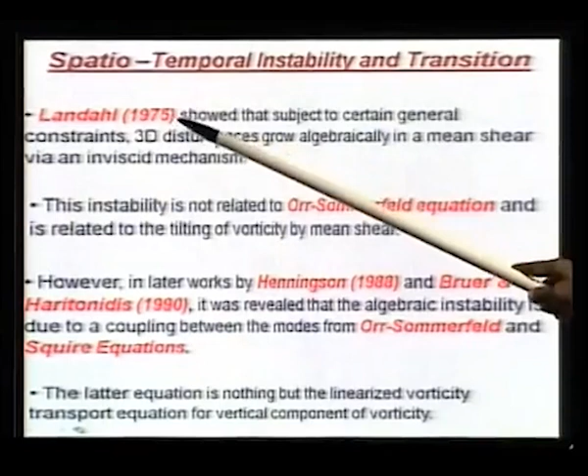Having discussed spatial and temporal instabilities in isolation, we now discuss spatio-temporal instabilities, where disturbance grows both in space and time simultaneously. A lot of work has gone into this. One of the earlier works was by Landahl, who discussed an inviscid mechanism where 3D disturbances can grow algebraically in time and space, a mechanism distinctly different from the viscous instability given by the Orr-Sommerfeld equation.

Subsequently, Henningson, Breuer and Haritonidis revealed algebraic instability due to a viscous mechanism, coupling arising from the Orr-Sommerfeld equation and the Squire equation. The Squire equation is nothing but the linearized vorticity transport equation for omega y, considering a plate with flow in the x direction.

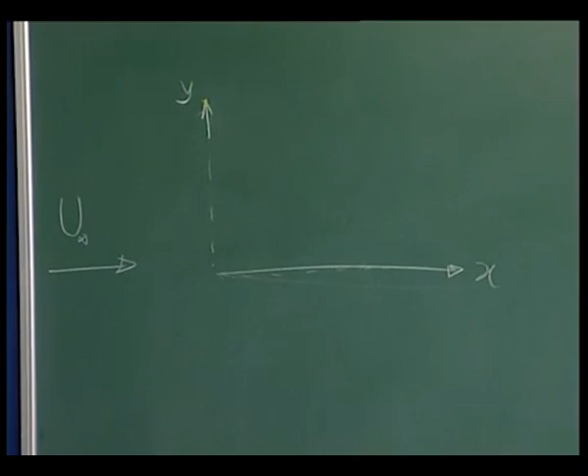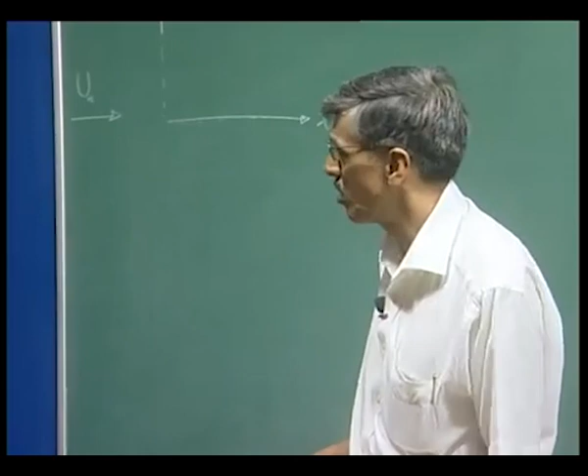There have been sporadic efforts going on and off, starting from the original observation of Morkovin that apart from the classical viscous or inviscid route, you could also have bypass transition. These efforts were looking for the bypass mechanism through which spatio-temporal instability can occur.

In the context of coupling between the linear modes given by the Orr-Sommerfeld equation and Squire equation, Breuer and Landahl found that if you go to the corresponding nonlinear stage, you could find a secondary instability that could lead to a spectacular growth of disturbance, directly leading to turbulence.

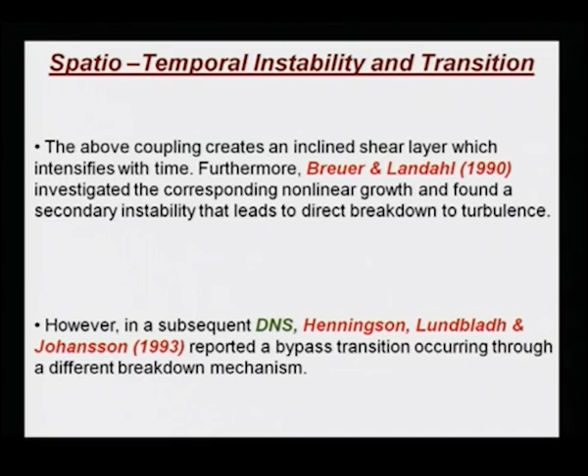While these things are going on, there are also efforts solving the full Navier-Stokes equation without assumptions, called direct numerical simulation. In one such effort, Henningson and co-authors talked about a bypass transition mechanism that does not depend on any of the previous linear instability mechanisms.

When looking for any bypass mechanism, people were looking for algebraic growth. This is of interest because it could lead to transient energy growth itself as the primary event, causing growth of disturbances by a factor of 100 or 1000, where nonlinear effects can directly come in and you get turbulence directly. If this happens in scenarios where viscous instabilities are not predicted, that is the subcritical route as pointed out by Breuer and Kuraishi.

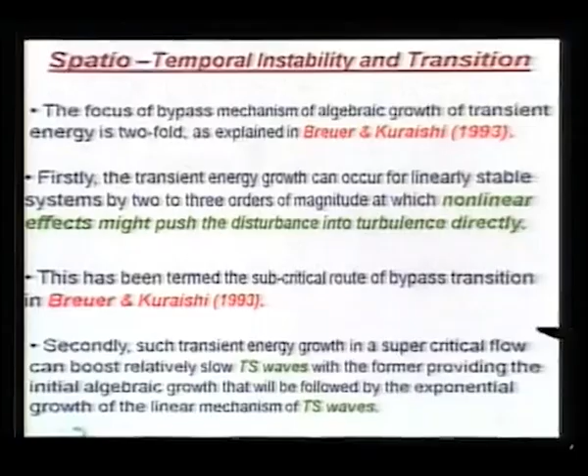The second route could be that you are in the supercritical stage, where you already have weak Tollmien-Schlichting waves, and if over and above that you have a layer of algebraic growth, you get a compounded effect that would also lead to turbulence. These are the two motivations for studying algebraic growth.

We have now stated quite a few of these scenarios. They are conjectural in the sense of theoretical projections. They have not been systematically studied experimentally in a controlled manner, so that one can unambiguously say this is exactly the mechanism by which things are happening.

There is an alternative viewpoint that this algebraic growth could occur due to the presence of modes which are not the normal modes obtained from the solution of the Orr-Sommerfeld equation. They are basically the non-normal modes.

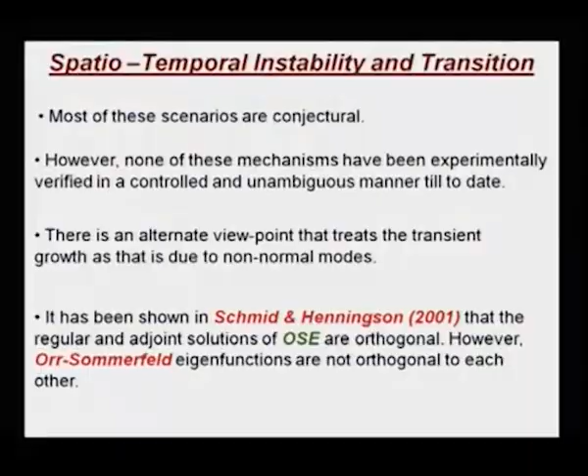Schmid and Henningson are the proponents of this view, and they noted that Orr-Sommerfeld equation modes constitute a set with respect to the adjoint of the Orr-Sommerfeld equation. However, each of the eigenfunctions of the Orr-Sommerfeld equation are not orthogonal to each other, so they are essentially non-normal.

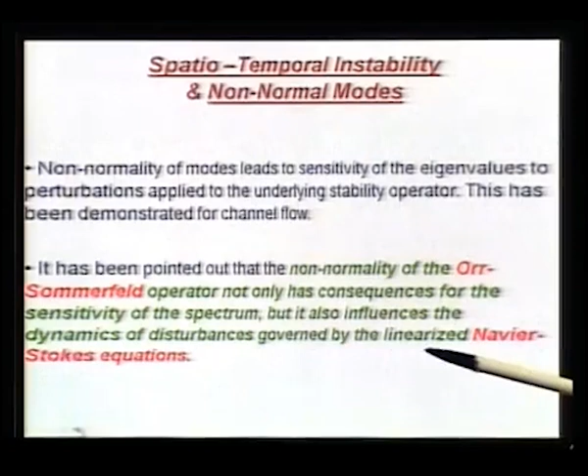Despite that, it has been noted that non-normal modes make the system very hypersensitive to background disturbances, due to the property of the stability operator of the governing equation. Some calculations done for channel flow have shown that this non-normality, via its sensitivity of the spectrum, can show completely different dynamics than given by the linearized Navier-Stokes equation.

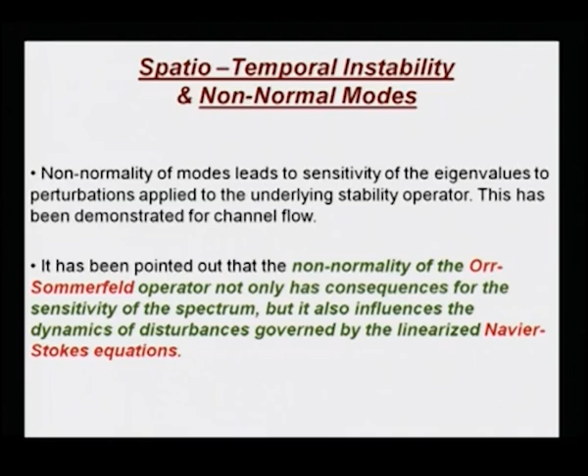When we take stock of this, we notice that the transient growth that occurs as a resultant phenomenon - even for a Blasius boundary layer at Reynolds number of 1000 - shows a 1000-fold increase in the 3D disturbance field. When you look at the corresponding 2D disturbance field, the growth rates are far too smaller.

However, what we are looking at in all of these cases is that one has talked predominantly about 3D disturbance field. The legacy of 3D disturbance field is attractive because even for fully developed turbulent flow, we have a mechanism of vortex stretching which is present in the 3D field. So people have tried to synthesize these two points of view and are looking for 3D disturbance field alone.

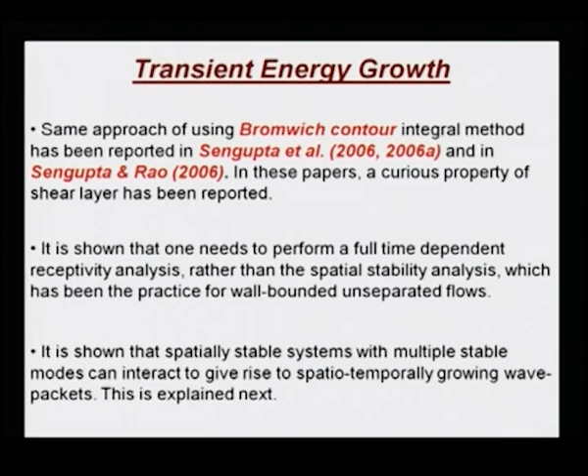However, when they interact, they can lead to a kind of spatiotemporal growth. This was something that was not known for more than the last 20 years.

But what is in a sense happening here can also be explained from our mechanical energy equation that we have developed. This was done very recently, just a few years ago.

We later also showed that this mechanical energy perspective is basically all-encompassing, because it comes from the Navier-Stokes equation and can include both the viscous as well as inviscid mechanisms. The main term comes from the nonlinear convection term, and the equivalence of viscous instability and the energy-based theory was also established, which we have talked about recently, or will talk about even more.

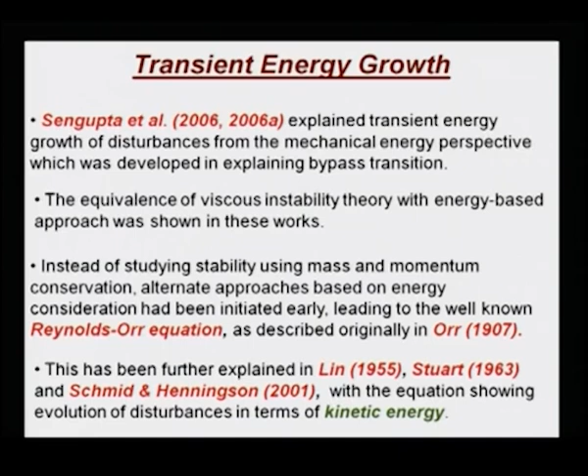However, we note historically that people have tried to study stability of flow from energy considerations. This goes back all the way to the time of Orr and Reynolds, who developed an equation called the Reynolds-Orr equation. This was further studied and explained in Lin and Stuart's work. You can also find it in Schmid and Henningson's monograph, where an equation for disturbance kinetic energy was developed.

Okay, so let us look at what this could be. This is basically obtained by looking at the Navier-Stokes equation. If you write it in indicial notation and then take a dot product of it with respect to the velocity itself, so I will get...

This term comes from the local acceleration term, and the convection terms will come in two sets. One is due to the action of the disturbance stress on the mean shear, and another is a complementary term that comes as a gradient transport term, which also includes the pressure term, the triple correlation of the disturbance term, as well as some viscous term here. And this is the usual pure viscous diffusion term.

The reason we write this is because if I look at this, this is nothing but a divergence term. So if I take a volume integral over the whole domain, and we go over a very large domain where some of these disturbance quantities go to zero, then we will notice that this term will not contribute.

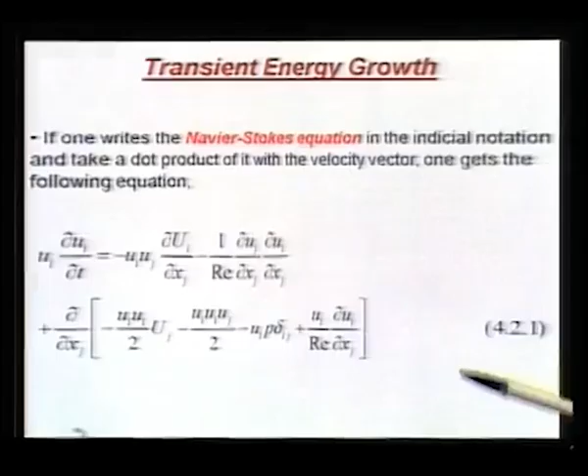Okay, and what about this term? This term is something like a second moment term. This is also a second moment term, but when you are looking for the second moment term evolution equation, this is already known—this is due to the mean shear. So that is like a linear term when you look at the evolution of the second moment.

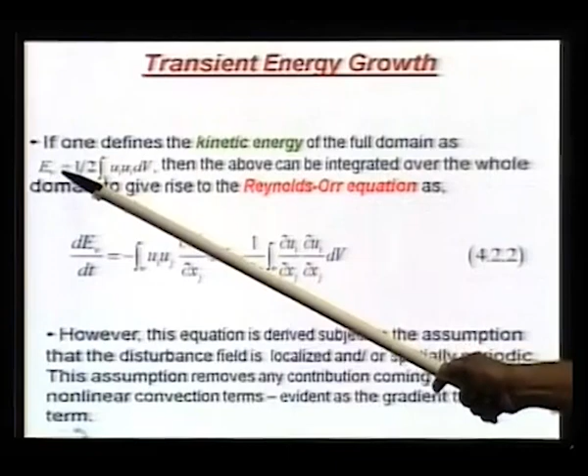In particular, you would be interested in talking about a particular quantity, the kinetic energy, which is also a second moment, but is nothing but half of ui squared. So if I write down the second moment matrix, these are the sum of the trace of that matrix—half u squared plus v squared plus w squared—integrated over the whole domain, call that E subscript v. That is your kinetic energy of the full domain.

And the previous equation that I wrote, we saw that if we integrate over the whole volume, the left hand side will give us this time rate of change of E v, and the right hand side you get this term, which comes from the effect of mean shear on the second moment term, and this is the viscous term.

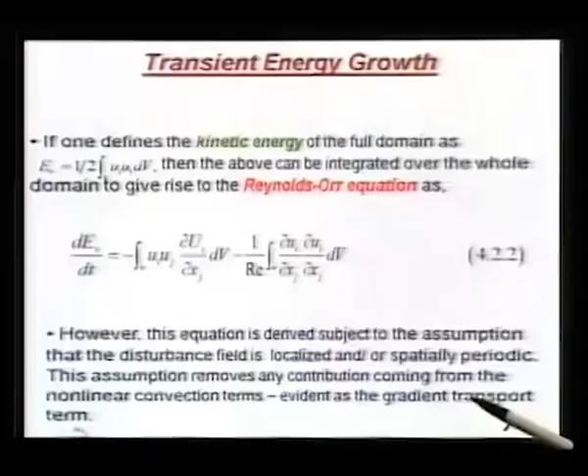This equation is derived subject to an assumption that the disturbance field we are talking about is localized, so that if we go very far field, it goes to zero, or at most could be spatially periodic, so it will cancel out. This kind of assumption actually removes any contribution coming from the nonlinearity.

What we are noticing so far is that most of the time the nonlinear convection terms are important. Even if you think of Rayleigh's equation, that was essentially the role of the nonlinear convection term. Then in Orr-Sommerfeld equation, we also looked at the nonlinear convection term and how it exchanges energy with the viscous diffusion term.

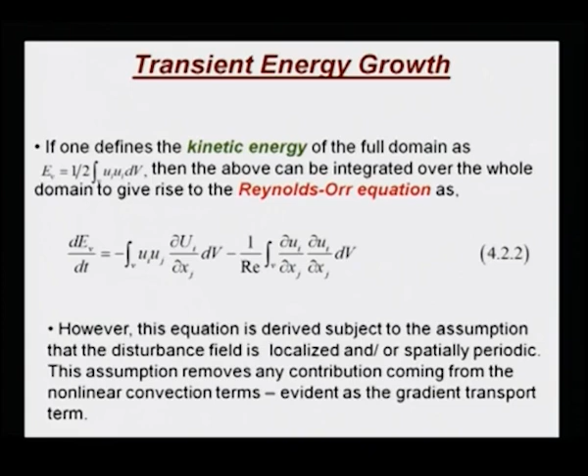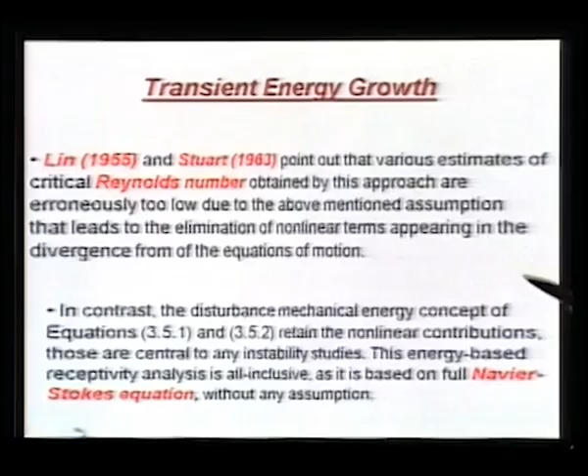But in this Reynolds-Orr equation, you lose the nonlinear term altogether, so no contribution comes from the nonlinear convection term. And what might happen as a consequence is you get a critical parameter like critical Reynolds number which is abysmally low. This was noted quite early by Lin and Stuart, who said this gives totally unphysical results. For example, for the Blasius boundary layer, it could give a critical Reynolds number of less than 10. So you can understand there is something totally wrong, and that is due to the elimination of the nonlinear terms.

If you contrast that kinetic energy equation with the mechanical energy equation we have developed and talked about in great detail, we find that the nonlinear contributions are very much there. We have estimated the various effects, and this energy based receptivity analysis is all inclusive, based on the full Navier-Stokes equation without making any assumption. We can study it in its linear form as well as nonlinear form.

Now we would like to relate that energy equation approach with what we are talking about here in terms of spatiotemporal instability, the viscous instability.

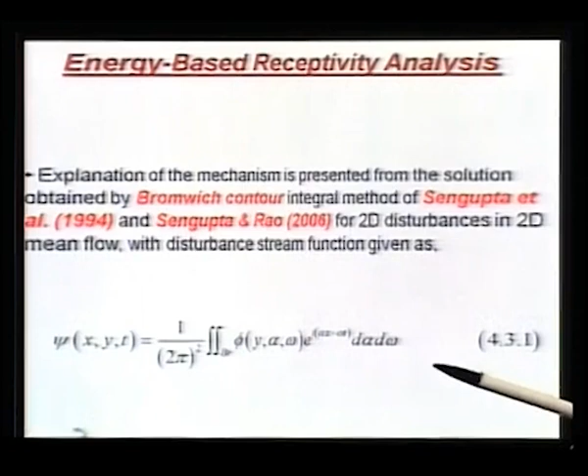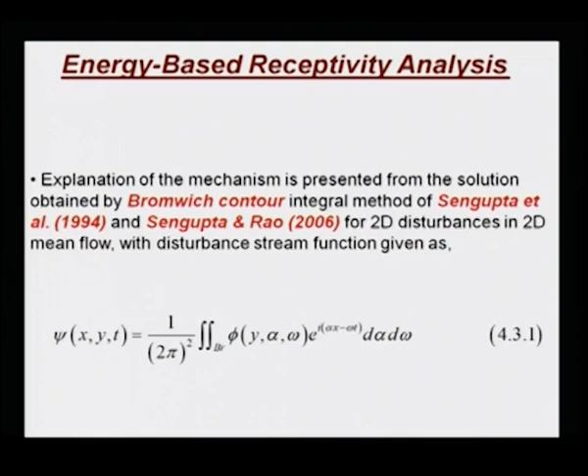However, we are going to study it in the context of the Bromwich contour integral. One interesting difference between this Bromwich contour integral method and the classical eigenvalue analysis based on the Orr-Sommerfeld equation is that this is certainly not based on normal mode analysis. So what happens is you can look at the effect of all the modes simultaneously together. This is something unique and very important. And secondly, we are not making a spatial or temporal approach separately, we are looking at it together. So these two are the major reasons that should recommend this as a good way of looking at it.

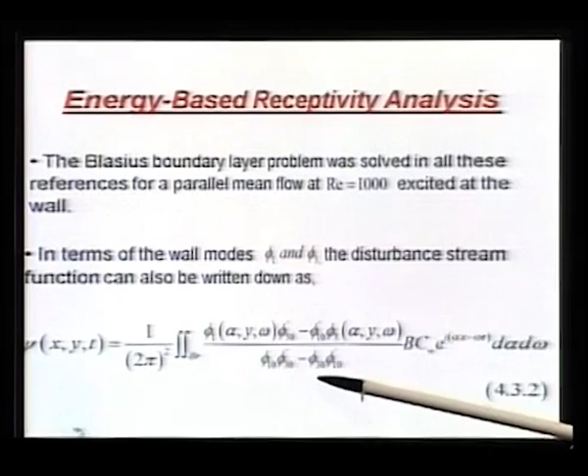So suppose we look at the Blasius boundary layer problem with reference to even a parallel mean flow. Go back to our standard solutions that we have studied. Then if we write in terms of the wall modes phi 1 and phi 3, the disturbance stream function would be written like this, and you can very clearly note that the dispersion relation is in the denominator. This is how we coupled the receptivity and the stability equation. In addition, this condition BCW tells you how exactly the shear layer has been destabilized from the wall, so that is essentially a boundary condition coming from the wall.

So we can have various formalisms of this quantity that we have already seen. This BCW was nothing but something like the Fourier-Laplace transform of the disturbance stream function phi, for any alpha, any omega, evaluated at y equal to 0. That is your BCW.

And you can notice there are possibilities that at the wall you will have a no-slip condition, and we can have a kind of localized disturbance source, which is indicated by this delta function. That is one thing in terms of spatial localization. And we also wanted to know about its finite startup time, which would come through this kind of Heaviside function.

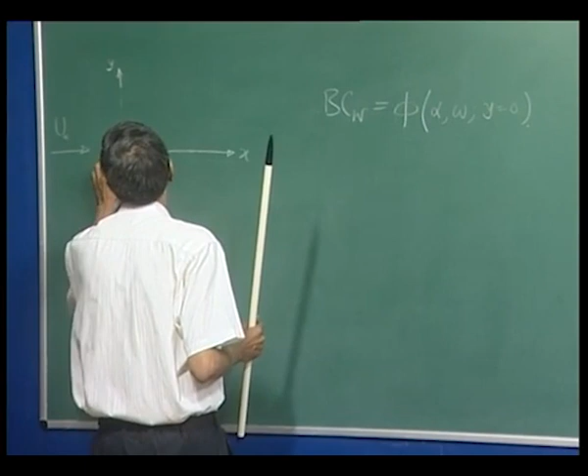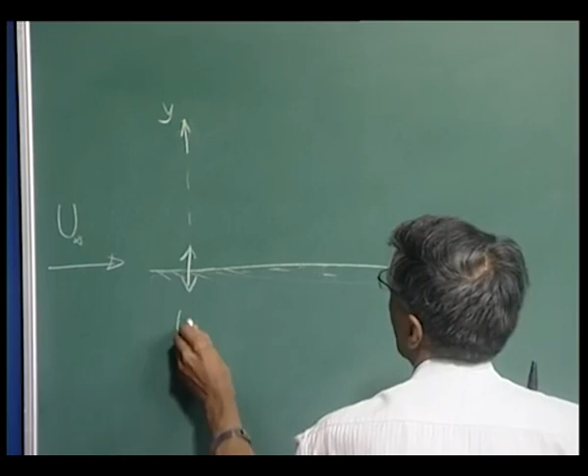So we are basically talking about, let's say, a flat plate, and we position an exciter at the origin, that is what we are doing. So we have an exciter which is excited at a frequency omega naught, and it is harmonic, which is why we have given e to the power minus i omega naught t, and its localized nature gives us delta x, and it is started at t equal to 0.

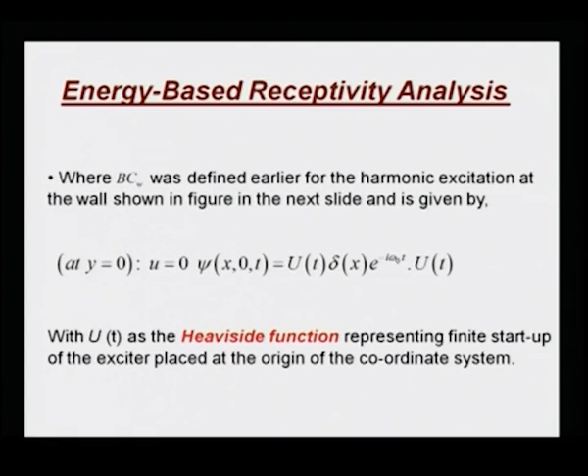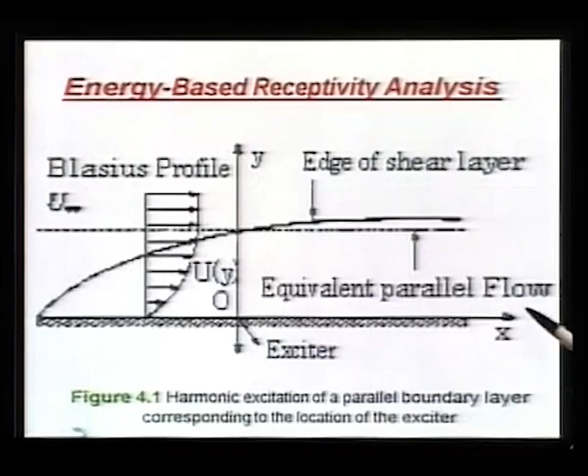Let us see what we get out of this. We have already recounted what happens when we look at the spatially unstable system, where we looked at the Fourier Laplace transform, given by the Orr-Sommerfeld equation, and we now try to study this problem again.

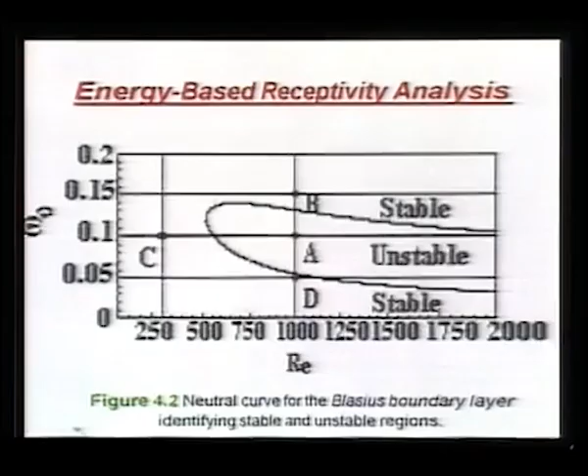Now we want to study not only spatially unstable systems, but also what spatially stable systems do, as shown here with respect to receptivity studies, where we have positioned exciters corresponding to the various locations marked A, B, C and D. A is what we have already studied, very much inside the unstable core of this neutral loop. B is stable but above the neutral stable curve, D is also stable but below it, and C is a subcritical point. These are the 4 points we are going to study next and see what we get.

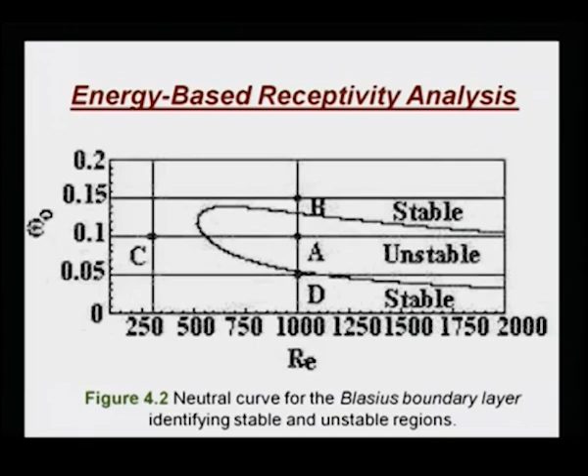Considering that we have already seen the solution for point A, we made the comment that what we get from the full spatiotemporal analysis looks essentially the same as what we would have gotten from the spatial analysis itself.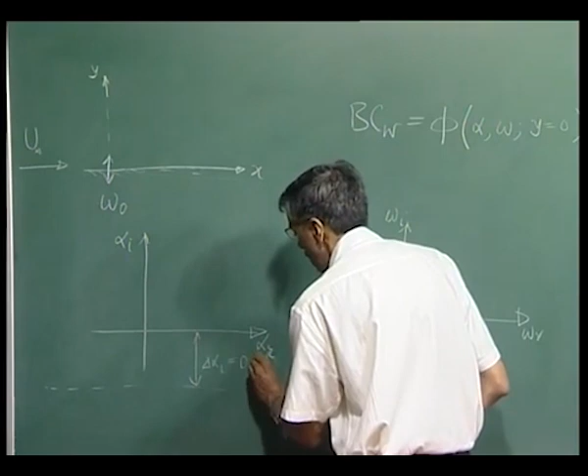For point A, we had looked at the Bromwich contour in the alpha plane, with alpha r and alpha I axes, and similarly omega r and omega I. When choosing the Bromwich contour integral, we chose a contour parallel to the alpha r axis, at a distance of something like 0.009. Why? For a Reynolds number of 1000, the maximum growth rate is of the order of minus 0.008, so there would be a maximum unstable mode somewhere here, and we want to keep the contour close to it.

What is the reason for this? There would be many modes - in this case maybe 2 modes in addition to the unstable mode. We want the effect of all these 3 modes to be captured along the Bromwich contour. When we take it as close to the unstable point as possible, we get its maximal effect without losing anything numerically. But if I keep the Bromwich contour farther down, I will still have those effects from all 3 points, but may lose out in terms of numerics. That is why choosing these contours is important.

You try to find the location from the grid search method, then polish it with the Newton-Raphson search, and find out which is the most damaging mode, locating the Bromwich contour in the alpha plane as close as possible to it, but below it. Why? Because this eigenvalue corresponds to downstream propagation, so all downstream propagating modes should be above the Bromwich contour.

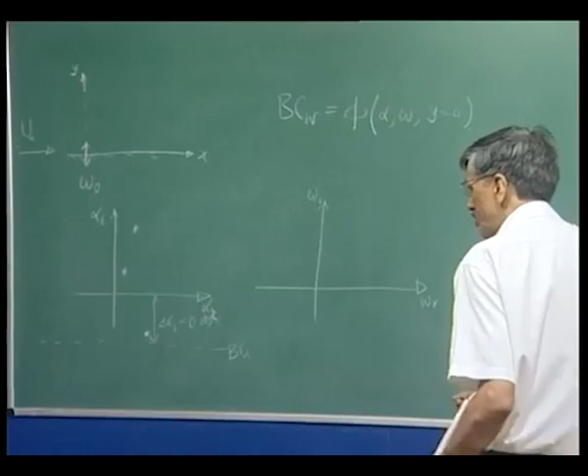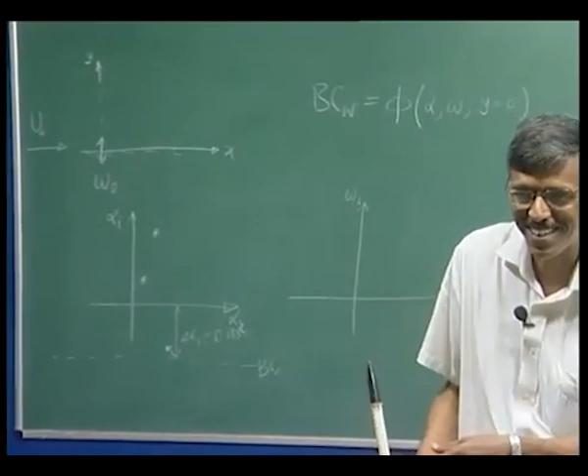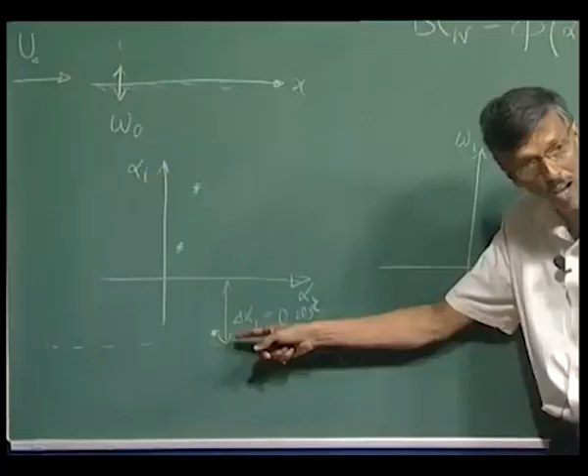If I choose a Bromwich contour like this, the answer will be meaningless, because then we are giving it a role as if the disturbance is going upstream, which would be funny. With respect to this contour, it would represent upstream propagation, and this would then become a stable mode also, since it has alpha I negative - below the Bromwich contour it becomes a stable upstream propagating mode. But from our eigenvalue analysis, we found it is basically a downstream propagating and unstable mode. That is why we have to choose it this way.

So basically we understand - every bit of whatever we have learned is not wasted. We have to do the stability analysis, the grid search, the Newton-Raphson polishing, identify the location of individual modes, and then we can do this Bromwich contour integral. That is what I kept telling you all the time - the Bromwich contour integral is not given to us a priori, we will have to do some extra work.

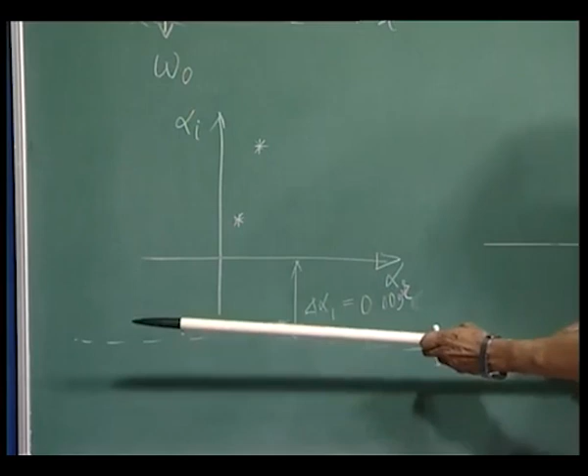In contrast to this Bromwich contour below the real axis, here what we would do is place it in such a way that it would be above all possible eigenvalues.

Why are we doing this? Because this multiplies by e to the power I alpha x minus I omega t. So basically all the eigenvalues have to be below this, otherwise you will get a non-causal situation. So we want to satisfy the causality condition, so we try to put it above, and in this case, in the omega plane, we choose it at a fairly high value.

Okay, so this value we have taken as something like 0.02. That is what I promised you that we will discuss in detail. So today we are telling you how to choose these Bromwich contours.

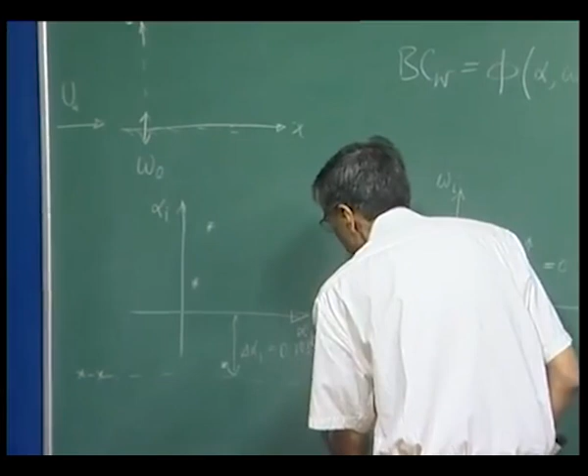The Bromwich contours have to be chosen in the alpha and omega-I plane like this, and once the Bromwich contours have been identified, we can solve the Orr-Sommerfeld equation starting all the way from one end to the other. Theoretically speaking, you should like to go from minus infinity to plus infinity.

However, we do not want to do this, for one reason: we have a finite resolution, some delta alpha-r possible, and what we have done is treated minus 20 itself as something like minus infinity. In the context of eigenvalue analysis, what kind of alpha-r do we get? It is always less than about 1 or so.

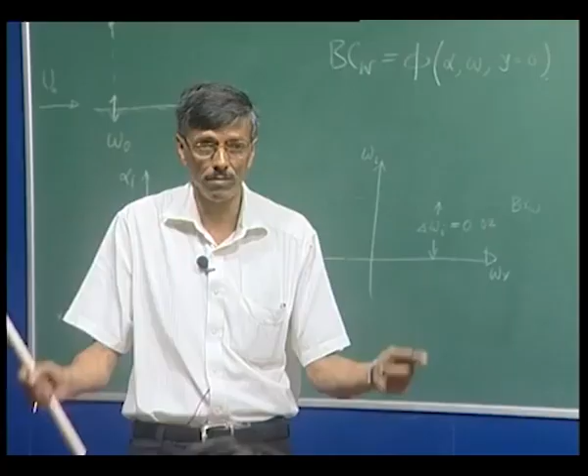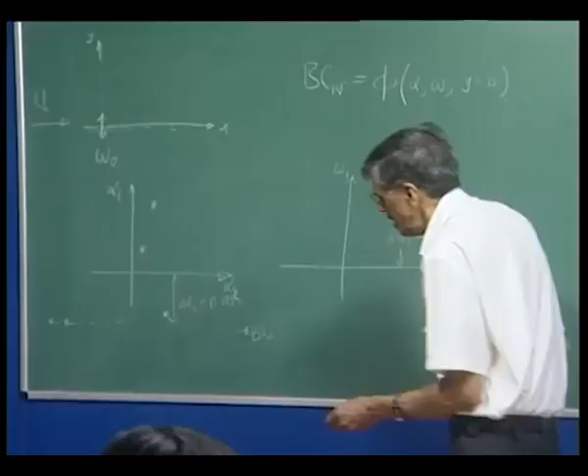So compared to that, these are distant ends. That is what we have figured out, that we can take it from minus 20 to plus 20, and in that interval we take the number of points which are 2 to the power something. Because we want to do a very good quality FFT with radix 2, we take 2 to the power 12 points. Let me call this the number of points in the alpha plane.

That is something like 4,096 points, because 2 to the power 10 is 1024, so 2 to the power 12 is 4,096 points. We have also done it even higher, 8,192 points. So that is the kind of number of points that we take.

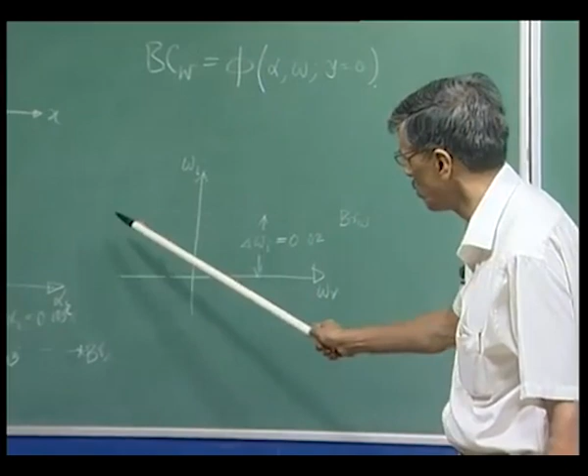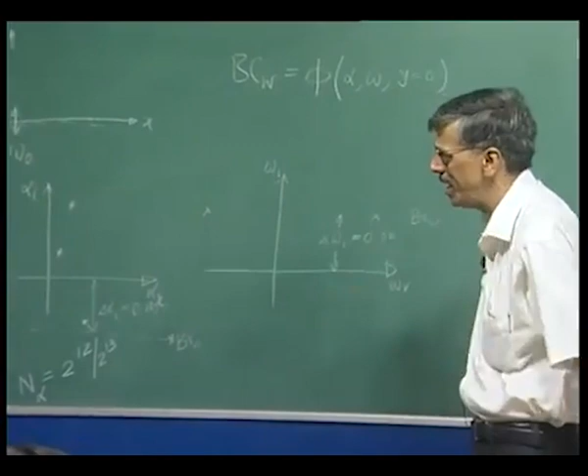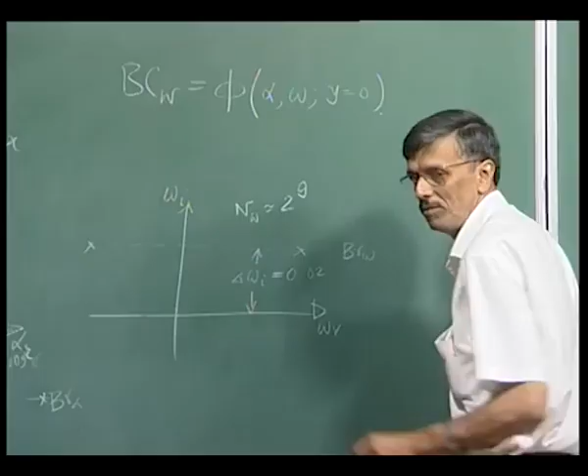We also have to take a large number of points in the omega plane, and some of the calculations we have done were taken from a certain omega range. This omega range, interestingly, we have taken far too small, minus 1 to plus 1, and we have taken the number of points here as 2 to the power 9, 512 points. Well, this is something we probably did about 5 years ago.

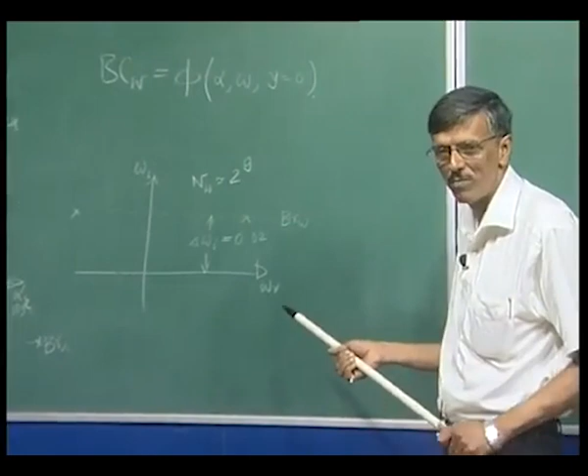If we were to do it today, we would be in a better situation; we may take more points. What happens here is, when I take the number of points and omega max, delta omega gets fixed, and the moment I fix delta omega, that fixes my T max. So I am doing a simulation over a finite time range, dictated by 2 pi divided by delta omega.

So that means the simulation is valid only for a short time, and we wanted accuracy. That is why we have been forced to take it from -1 to +1. It's not that we like to take -1 to +1; one would like to take it maybe from -20 to +20 in the omega plane. We have to take corresponding points.

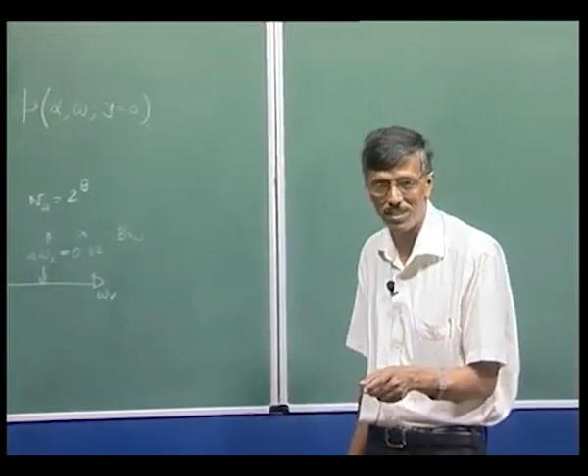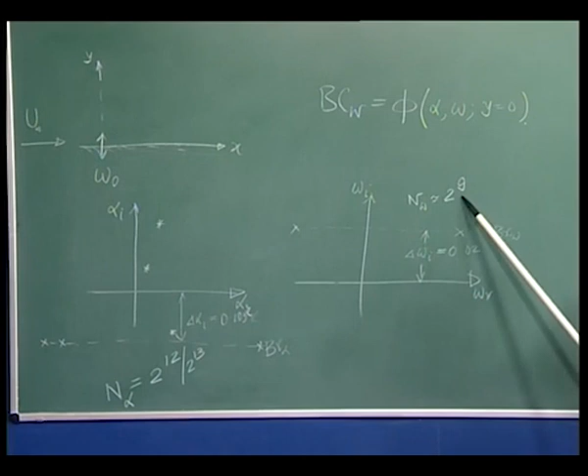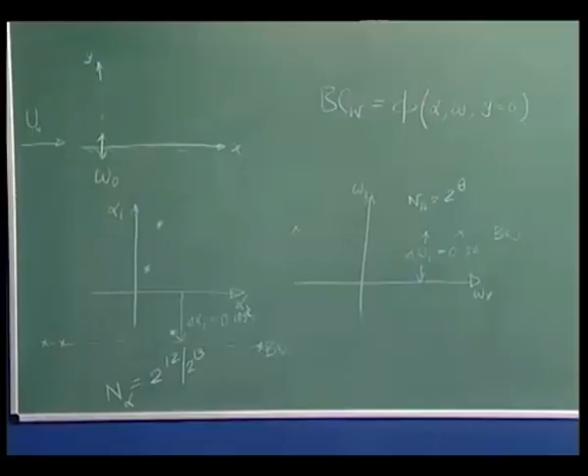So you have to be solving the Orr-Sommerfeld equation 2 million times, and we are solving the problem in a range which is not too high, about 6 to 8 delta star. Six to 8 delta star — and how many points do we take in there?

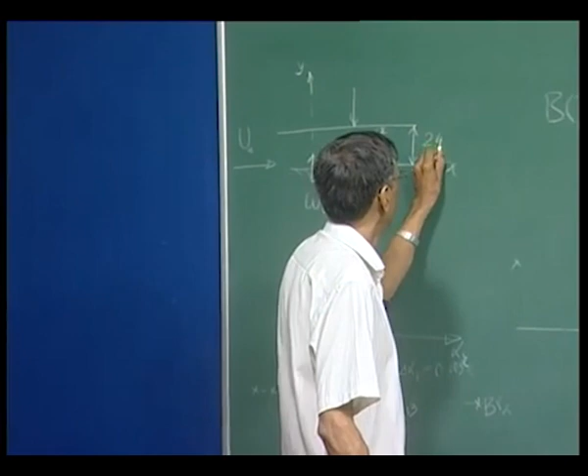Well, I think those of us who only do CFD and do not do this kind of calculation will be quite surprised. We take about, well, the results I'm going to show have taken some 2,400 points. We have also taken 4,000 points. You need that kind of resolution to pick up these waves as accurately as possible.

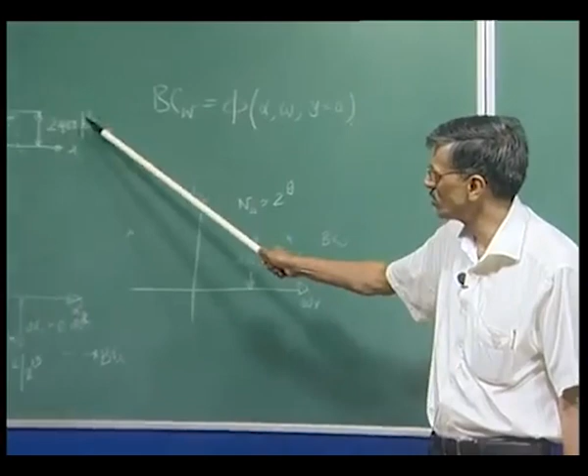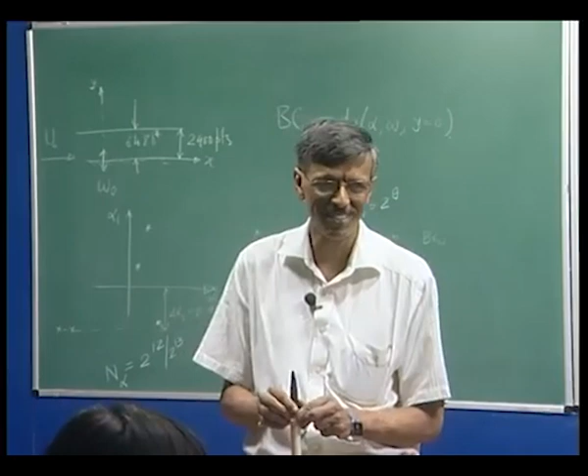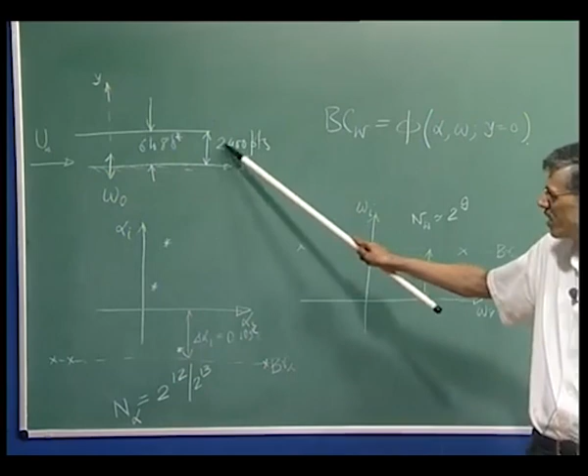So basically you can think of the resolution as 2,400 times about 4,000 points in the xy plane. That is about 8 million points within only 8 delta star. This is interesting because those who do CFD may have seen publications saying they've done a very well-resolved calculation, taking 20 points or 100 points inside the boundary layer. Here we are talking about thousands and thousands of points, because the boundary layer is about 3 delta star, so you are looking at 1,000 points within the boundary layer.

So computing the equilibrium flow is one type of activity.

Computing a disturbance flow is activity for grown-ups who have matured and have the confidence in solving the real disturbance quantity. It takes that much more effort to get your linearized Navier-Stokes equation to give you quality results which pick up all those eigenvalues of the associated eigenmodes correctly. So this is something I thought I'd explain sometime.

So today we figured out, as I told you, that in the results I'm going to show, these are basically 2 to the power 13 points in the alpha plane and 2 to the power 8 in the omega plane, and y range was from 0 to 7, about 2,400 points. You'll see once we look at the grid search method along with the Newton-Raphson search for all these 4 points, we get these kinds of modes.

The point A, we found out, was inside the neutral loop, indicated here with a negative value of alpha I. You can also see it's a downstream propagating mode because the group velocity is 0.42. The other 2 modes that you find are stable. Wave number is half of this unstable wave number. This is also the same thing. The growth rates - they are not growth rates, they are decay rates - are huge. And the group velocities are also the same kind. This is almost half u infinity, this is almost close to 1 u infinity.

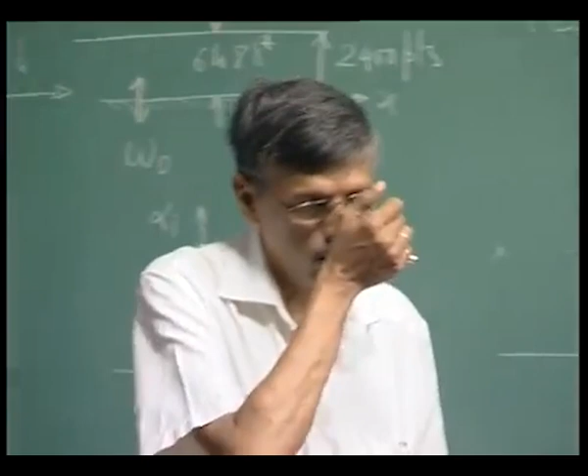These are what we call the signal speed and the energy propagation speed. We'll talk about it, we'll come back to how we obtain it, but we know how to do it - we've done it. So point A is inside the neutral loop. I mean all these three - point A is inside the neutral loop and has only 3 modes. And we now know, because of that essential singularity, we can represent any arbitrary disturbance in terms of these 3 modes plus the point at infinity. We've already done that.

The point B was where? It was above the neutral loop. So there we find we again get 3 modes, and all 3 modes are essentially stable. This is the least stable, but still it is plus 0.01, and the group velocities indicate all those 3 modes to be downstream propagating.

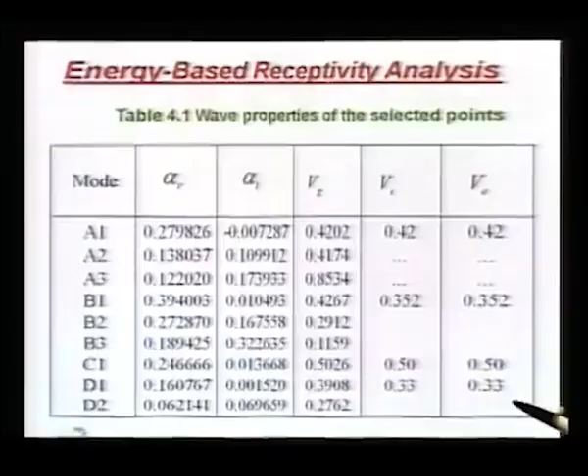And in contrast, C1, which was a subcritical point, there we find you have only one mode with alpha as 0.25. Alpha is also indicative of a stable mode, and the group velocity is half of u infinity. The point D, which was again at the same r equal to 1000 but little below the neutral curve, there we have only 2 modes, and those 2 modes have alpha I given by this, and the VGs indicated by this.

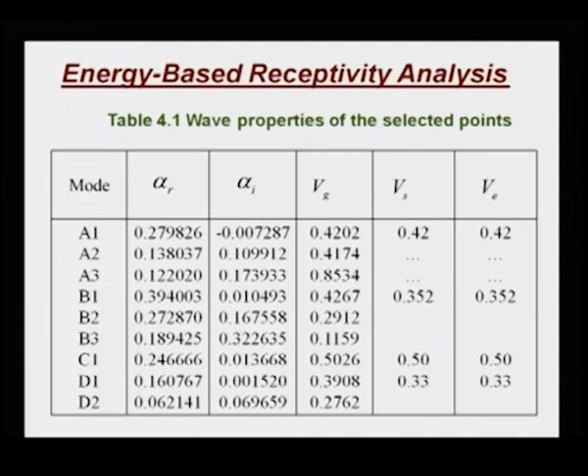So essentially all the things you are seeing in this table correspond to downstream propagating modes. We will come back to this table again when we talk about the results. Now we have seen that at point A, we do get the solution to be unstable, and that is what is shown in the next slide.

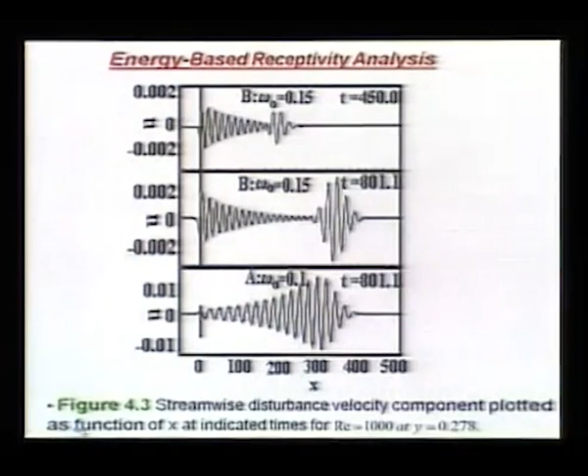So if I now look at those other points, I could see something different. But before we do that, let's sum up what we've seen: performing that receptivity analysis, we notice the local solution in the immediate neighborhood of the exciter, and additionally we have a forerunner. This is the one that precedes even the asymptotic part of the solution, and this you can only get when you do a full time analysis.

If you just do a spatial stability analysis or even spatial receptivity analysis, we called it a signal problem, and if we had assumed that omega only goes as omega naught, we would not get this. So it's not only that you will have to do receptivity analysis, you will also have to do a full time dependent receptivity analysis. For spatially unstable systems, one cannot see a clear demarcation line between the asymptotic solution and the forerunner, with one merging smoothly with the other.

For point A, the receptivity solution is dominated by the leading eigenmodes. Say we had 3 eigenmodes, and the one that is growing is the one that dictates the fate of the packet, with not much effect coming from the second and third mode. Why and how do I say that? We have the solution, the asymptotic part.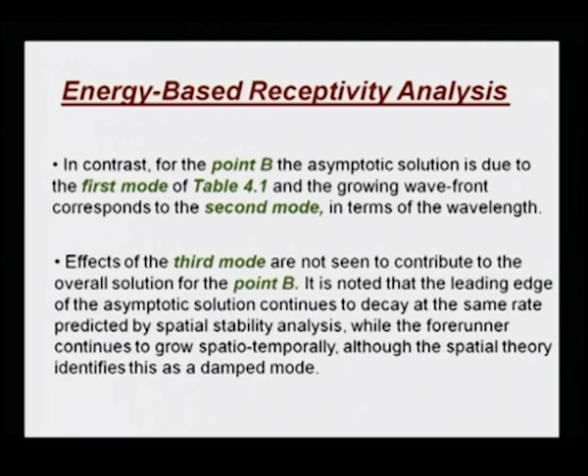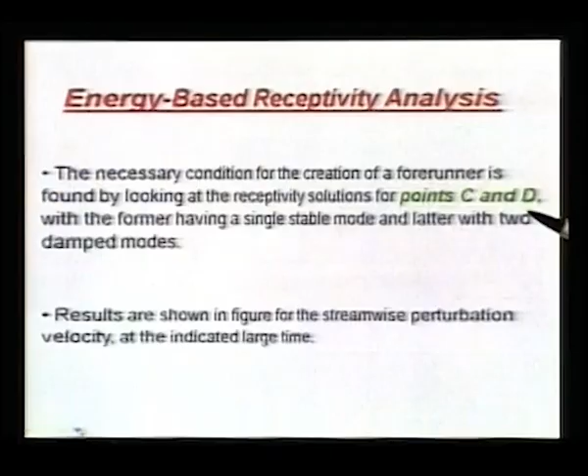What we notice is that to get this spatiotemporal mode, we probably need to look at solutions for other points. D was a point below the neutral curve, and C was a point to the left of the neutral curve. Let's look at those two points and the corresponding receptivity analysis. For point C, there was only a single mode, and that was a damped mode, and that's what we are seeing.

So for C, omega naught is kept the same, but Reynolds number is lowered, and for point D, Reynolds number is kept the same, but omega has been reduced to 0.05. A corresponded to 0.1, B corresponded to 0.15, D corresponds to 0.05. And here you could see that this is very close to the neutral curve.

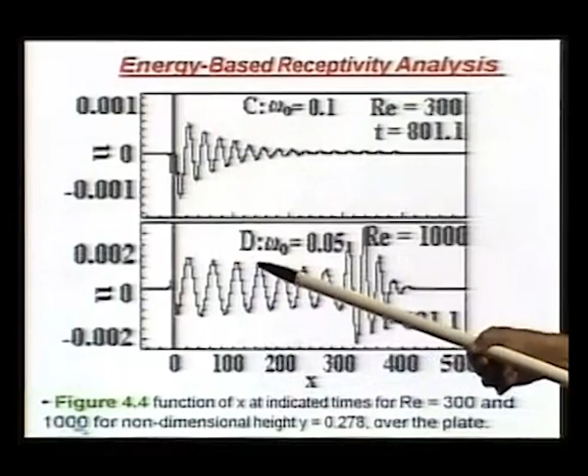So the leading mode is damped, but it is almost near neutral, and that's what you are seeing. It is slowly decaying, but it has a sort of leading mode here, a spatiotemporal mode.

Let me tell you a little historic fact. Sommerfeld's student Brillouin was interested in investigating the effect of forerunners for electromagnetic wave propagation. If you look at the book written by Brillouin on waves, you will see he was more interested in looking at forerunners in electromagnetic waves, and there he could not find it. In electromagnetic waves you are looking at a non-dissipative system, whereas what we are studying here is a kind of dissipative fluid dynamical system. So what he was looking for in electromagnetic waves, we can see something of that kind for a hydrodynamic case.

This was something really out of the blue, because people did not anticipate this would be there. When we figured it out, our motivation was trying to explain the dynamics of a spatially stable system. I told you we were interested in investigating a case where the basic dynamics is given by a stable system, but yet it supports very large spatiotemporal growth, like what you see in a tsunami kind of scenario. Because if you look at the ocean boundary layer, it is a spatially stable system. But if the ocean boundary layer is excited by a delta function like an earthquake at the ocean bed, then what happens? That was what we were trying to investigate, and our investigation did show this.

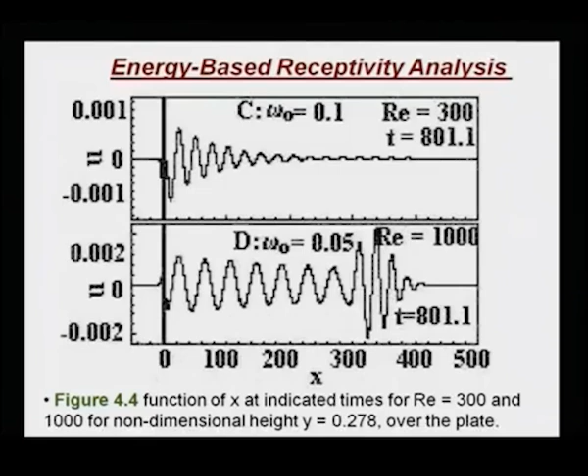You can very clearly see what people have narrated as their personal experience on the seashore during such events: that you see some small waves coming, then one or two large big waves, and then everything quietens down. Exactly the kind of thing you are looking at here. Although I would not stretch it any further, because this is a Blasius boundary layer, one can do that. We leave it to our friends in oceanography who do this kind of study. If they can do such high fidelity calculations like what we have been talking about here, there is a possibility this could be investigated.

The main point we are trying to make is essentially the following: not only will you be able to establish the spatiotemporal growth and decay of such packets, the forerunner, which originally started with Brillouin's idea looking for it in electromagnetic waves, but you have shown it here for hydrodynamic waves.

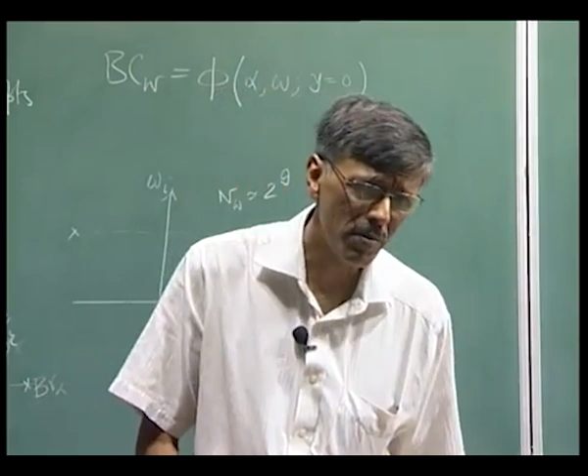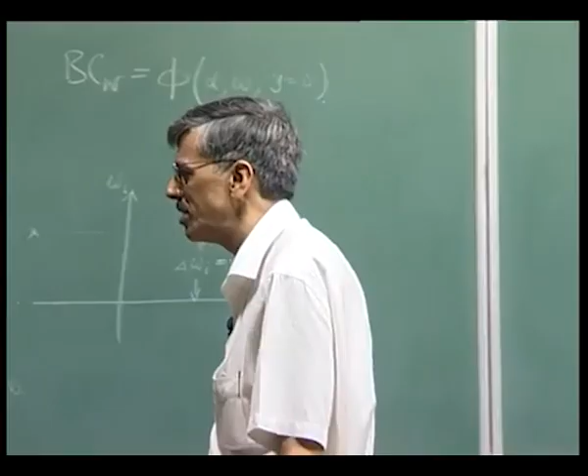I think you can also look at it from a directionality point of view, because this is all done in a 2D scenario. So I am once again giving an idea for further research. If anyone is interested, one can look at it in a 3-dimensional field, and then you can also find out the group velocity, and you will see why a tsunami comes in direction x and does not hit this port B, station B, because it would have directionality. From the group velocity we can calculate Vgx and Vgz, and we can say which direction it will go. So there is a possibility of doing this. There are lots of things.

Let us now try to summarize what we have seen in these figures: while in the earlier two figures, A and B, we had 3 modes, here C possesses a single mode and D possesses 2 modes. The forerunner in figure 4.3 is due to interaction of multiple stable modes.

Well, I write this with bated breath, because this has to be qualified with further studies. However, if we do not have multiple modes, as was the case for point C, we did not see a spatiotemporal growing wave front. So can we say that having more than one mode is a necessary and sufficient condition for spatiotemporal growth? Or was it that at that Reynolds number of 300, corresponding to point C, the temporal dynamics is such that we do not see any spatiotemporal growth wave front? So one has to really fill up the gap between 1000 and 300 and see what is the history of the spatiotemporal growth wave front, right? These are some of the things looking straight at us, trying to encourage some of you into studying it and figure out what is going on here.

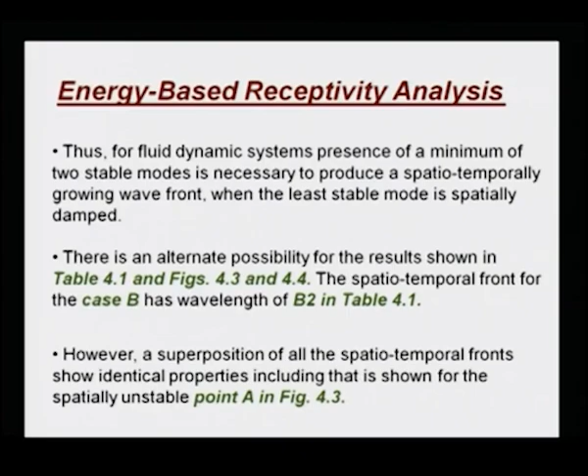This is the alternative that we are talking about. The alternate possibility is that the spatiotemporal front for case B has wavelength of B2, meaning one of the modes. But this is not necessarily true, because if we superpose the spatiotemporal front for A, B and D, which are all for the same Reynolds number, they seem to fall on each other.

So, is it something a function of Re alone? That is what I am suggesting to all of you, that there is a possibility that one could study the dependence of the spatiotemporal wave front on Reynolds number. That is a problem that needs to be solved. So that is what I am making a conjecture here. I should be also allowed to make some conjecture, like everybody does.

So we are saying that this may raise a possibility that the forerunner is a wave packet centered around one of the unstable wave numbers corresponding to that fixed Reynolds number for all the 3 points A, B and D. We do not know. This possibility needs to be probed by looking at multimodal solutions at other Reynolds numbers and fixed propagation properties.

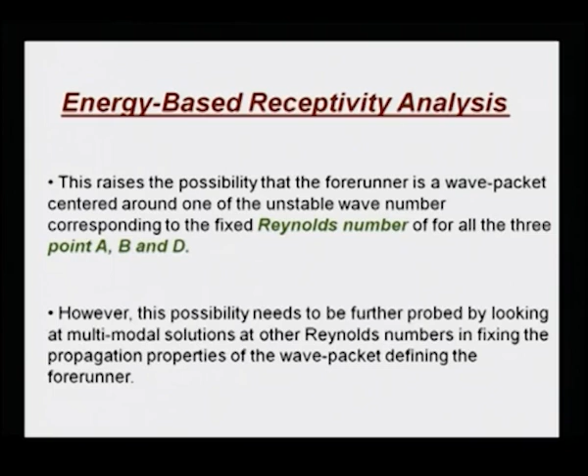So, if anyone of you is interested in doing a PhD, there is a topic straight ahead that could be looked at and solved.

However, we will talk about what happens when I look at the dynamics of a fluid Blasius boundary layer itself, where I excite the system in a band of frequency where all the individual modes are unstable. But if I excite the system with that band, what happens to it? That is what we are going to study. Even though all the individual modes are unstable, we will see that the overall dynamics may not show any growth at all.

This is one of the things that we should be very, very critical of in normal mode analysis. Studying things in isolation has actually impeded our understanding of fluid mechanics more than anything else. That is why there is so much need to adopt the Bromwich contour integral. However tough it may appear to begin with, I do not think we have an option at this point in time. There is now enough evidence to suggest that the growth of the forerunner is due to competing groups associated with multiple modes, which reinforce each other at the front.

So this is something that we need to be looking at, and as I told you, just for a record, look at the book by Brillouin. He was looking at the problem of electrodynamics in search of forerunners, the propagation speed of signals. This kind of disturbance propagation has been given a different name.

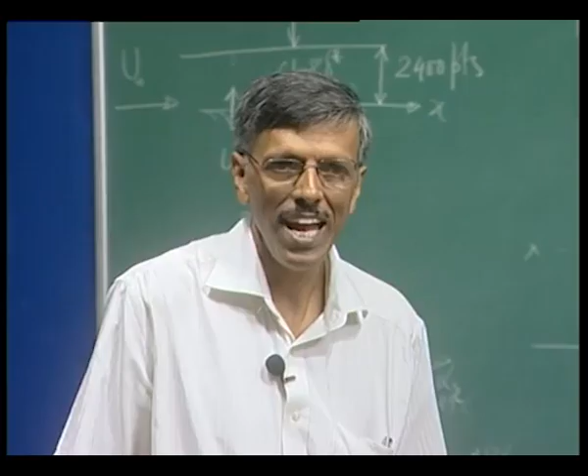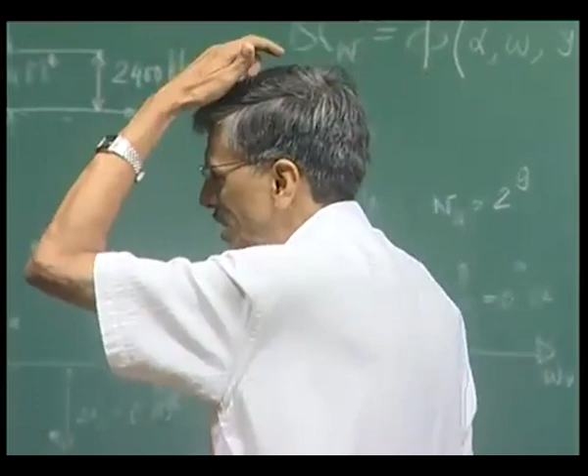Sommerfeld called it some kind of a signal velocity, okay? And Brillouin was the one who used to talk about energy propagation speed. That is why in the table you saw that we made 3 columns: group velocity, signal speed and energy propagation speed. So we want to basically figure out what this is.

And Brillouin made a sort of prophetic statement that if you are looking at a non-dissipative system, all these 3 will be identical, but if you are looking at a dissipative system, it may not be. However, for problems of electrodynamics, this forerunner is very weak, and it has been extremely difficult to trace it for electromagnetic waves in a stable system.

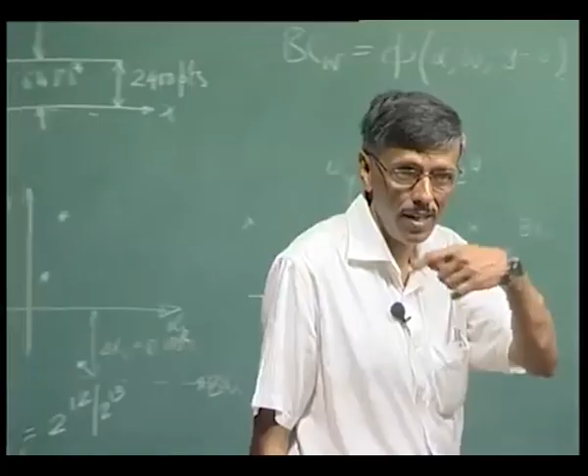However, Brillouin also noted that you will only look for it at the condition where group velocity actually attains some kind of a minima. So you will have a bandwidth, and if you plot the group velocity versus the wave number range, then if you have a minimum of the group velocity in that range, around there you should get to see some kind of high amplitude.

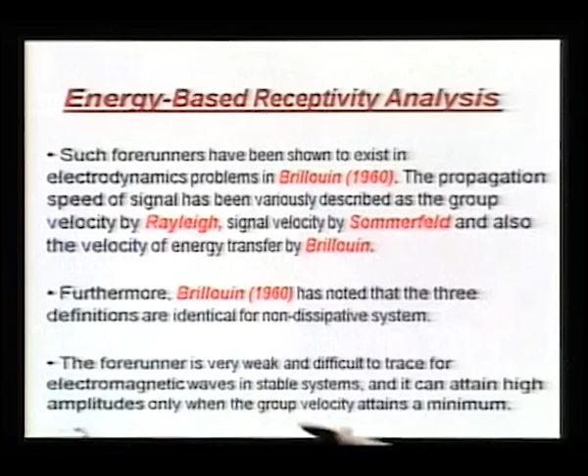We have not pursued it, so it is just for your consumption. I just lay out this fact.

We look at dissipative systems for fluid dynamics, and we take the cue from Brillouin and say that these velocities can differ considerably because we have both stable and unstable modes staying side by side.

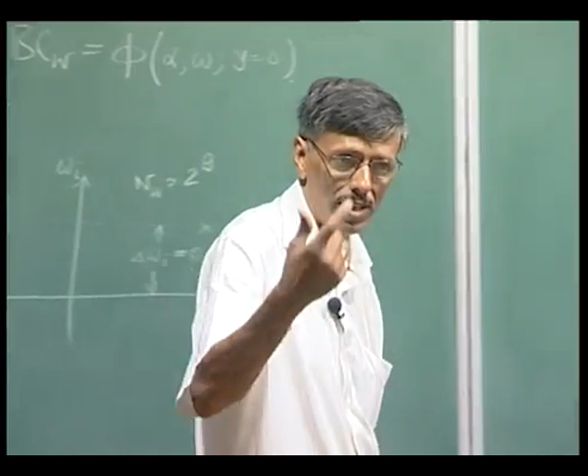So, I think I will stop here, and we will continue our discussion in the next class, where we will define the difference between group velocity, signal speed and energy speed, and how these things have to be obtained. We will talk about that.